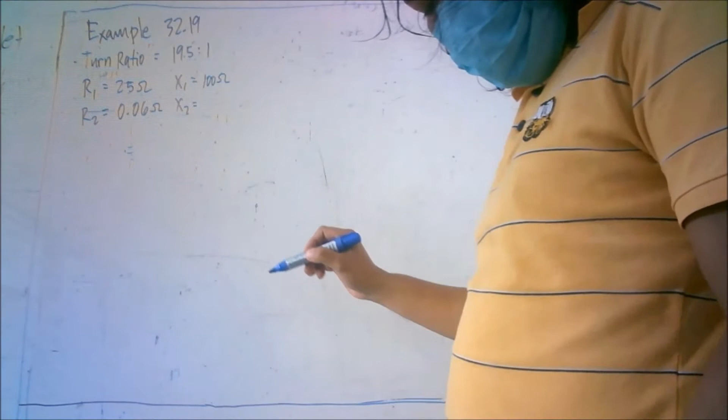Ano pang mga given? No load current ay I0 is 1.25, 30 degrees from flux, leading.

Tapos, secondary delivers at 200 amperes. I2 is equal to 200 amperes. Anong power factor niya? 0.8. And V2 terminal voltage is equal to 500 volts. So yan po yung ating mga given.

Okay. So solving daw po natin, determine by the aid of the vector diagram, the primary applied voltage V1. Ano pa? Primary power factor PF primary. Ano pa? And efficiency. Yan po yung mga kailangan natin alamin.

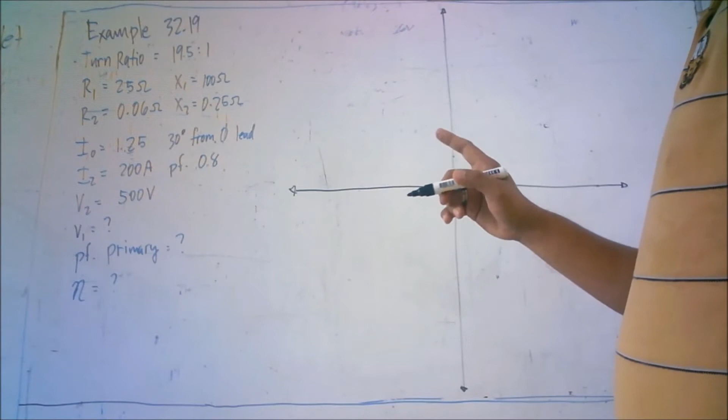Given natin yung I2 saka V2. So, kapag inductive load tayo, so we have V2 here. And I2. So, I2 natin ay 200 amperes. Yung V2 naman natin ay 500 volts.

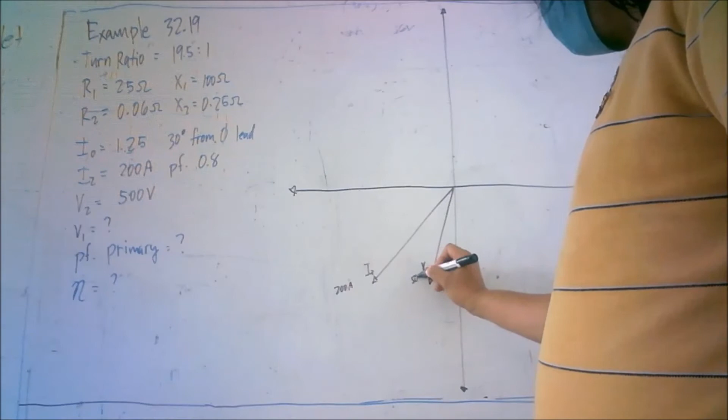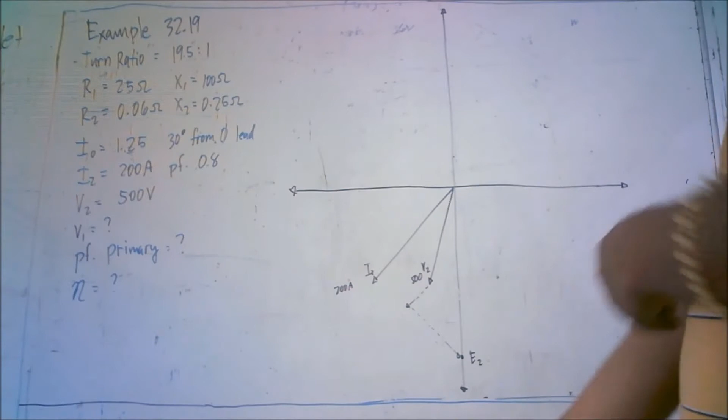So, sa pamamagitan niyan, makukuha na agad natin yung ating E2. So, yan bawa yung E2 natin nandito. Paano natin ma-determine yung E2 natin? By using the formula, E2 is equal to V2 plus I2 Z2.

So, di ba sa ating transformer, halimbawa may tayong transformer dito. Meron tayo ditong E2. Tapos meron tayo ditong V2. So, may current tayo I2. So, makukuha natin yung Z2 by combining our resistor and our inductor. So may voltage drop dito plus yung V sub 2 equal dun sa E sub 2 natin.

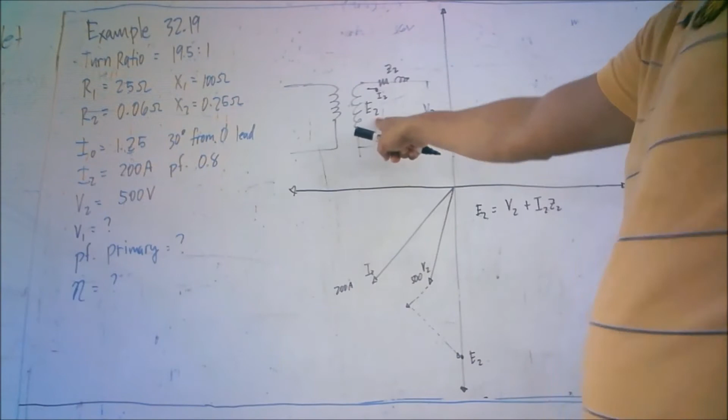Okay? So ilagay na natin yung mga parameters. E sub 2, V sub 2 is 500 volts. So ito po ang ating reference, V sub 2, at angle of 0 degrees. Plus, I sub 2, ano po yung I sub 2 natin? 200 amperes. Ano pong angle niya? So, our power factor here is 0.8.

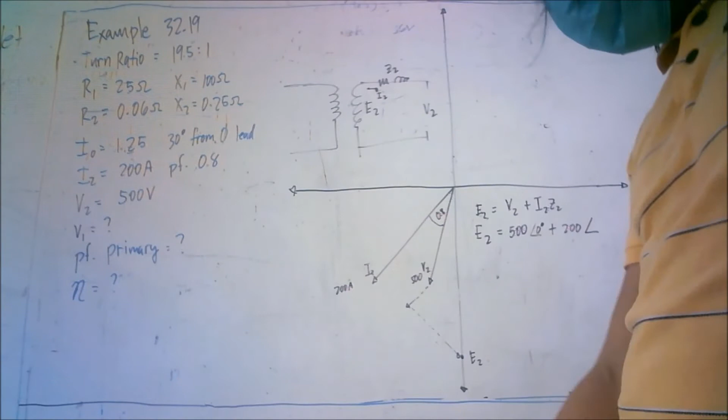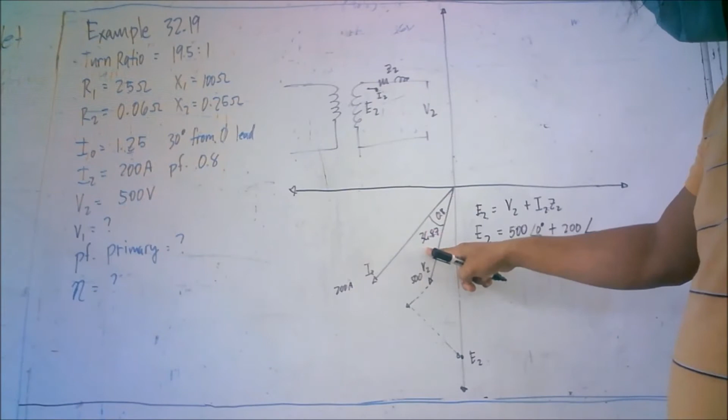So, shift cosine 0.8, 36.87. So, since nahuhuli siya sa V sub 2, so ibig sabihin, yung ating I sub 2 is laging lag V sub 2 by an angle of 36.87. So, negative 36.87.

Times. Ano yung Z sub 2 natin? Ang Z sub 2 po natin ay ito po, I2R2 saka I2X2. So magkakaroon po tayo dito ng I2 Z sub 2. Ano naman yung Z sub 2 natin? So sabi natin yung pinagsama natin ng R2 saka X sub 2.

Ano yung given R2? 0.06 plus j 0.25. Yan. So yan po yung ating E sub 2. So makukuha na po natin yung E sub 2 natin.

Compute natin 500 at an angle of 0 degrees plus 200 at an angle of negative 36.87 times the quantity 0.06 plus j 0.25.

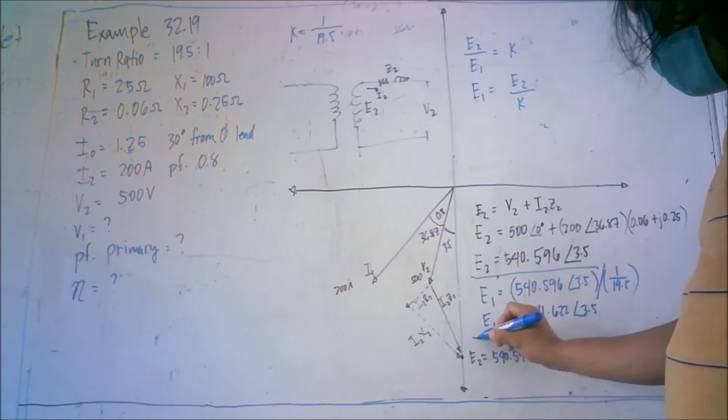Kasi 10,000 to, ito 540. Ang E sub 2 natin ay 540, so times 19.5, E sub 1 natin mahaba pa. Pero yung E sub 1 natin nandito daw sa taas. So kung nasa taas siya, anti-phase, so magiging negative E sub 1 yan. Kung positive ito, sa kabila negative. So negative E sub 1, so times negative 1.

Yan, so yun pa rin, 10,541.622 at an angle of negative 176.52. Ibig sabihin, mula dito sa E sub 2, negative 176 papunta dito. Pero kung gusto niyo dito dumaan, i-minus mo lang ito na 360 minus 176, magiging positive yan. So negative E sub 1 is, ilampas ko na lang dito.

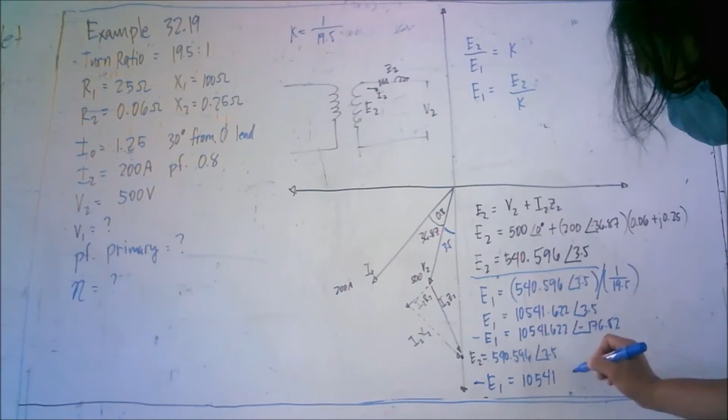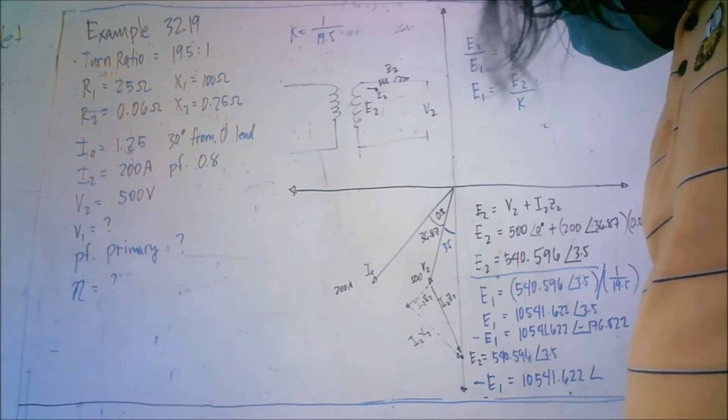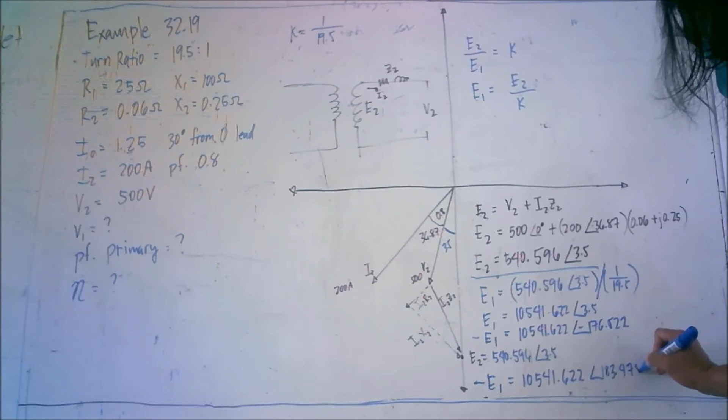10,541.622 at an angle of 176.522 ilalagay natin. 360 minus 176.522 - yan, 183.478. So 183.478, nakalagay dito po yan.

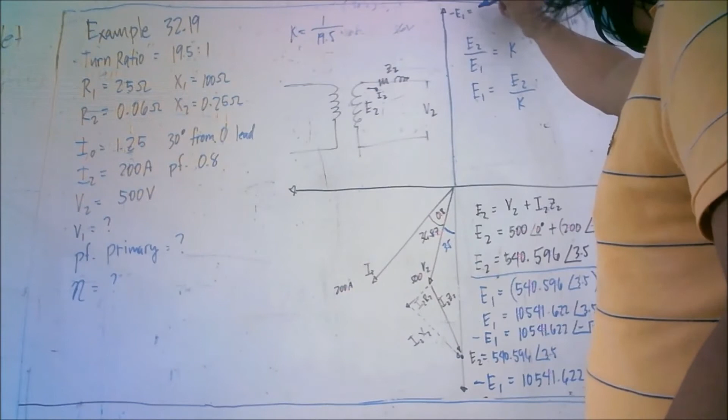So ito po yung ating E sub negative E sub 1, equal to 10,541.622 at an angle of 183.478.

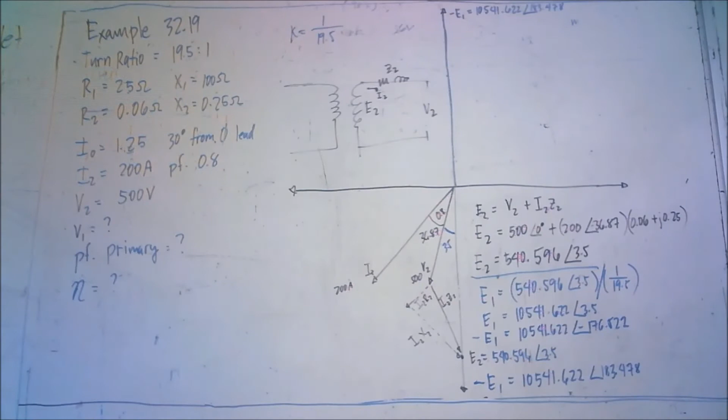Okay, so meron na tayong E sub 1. Pahingin ko na to. Kailangan natin ng pagsosolban. Nakuha na natin si E sub 1. Ang kailangan naman natin makuha ay siyempre si V sub 1.

So ano pa yung V sub 1 pala? Kung halimbawa ito ay V sub 1, ito yung ating E sub 1, tapos tayo dito ay merong Z sub 1, tapos I sub 1. So para makuha natin yung V sub 1 is equal to ilan? Voltage drop ay I1Z1 plus E1 - o yung negative E1 natin kasi negative siya. So negative E1. Yan po yung ating V1.

Kaya lang, wala pa tayong nakukuhang I1. Saan natin kukunin si I1? Ayun, meron tayong given I2. Diba napag-aralan natin, I sub 2 prime over I2 is equal to K. Yan, so I sub 2 prime is equal to K times I sub 2.

So pwede na natin itong pag-multiply. Ang K natin ay 1 over 19.5 times I sub 2 is 200, at an angle of negative 36.87.

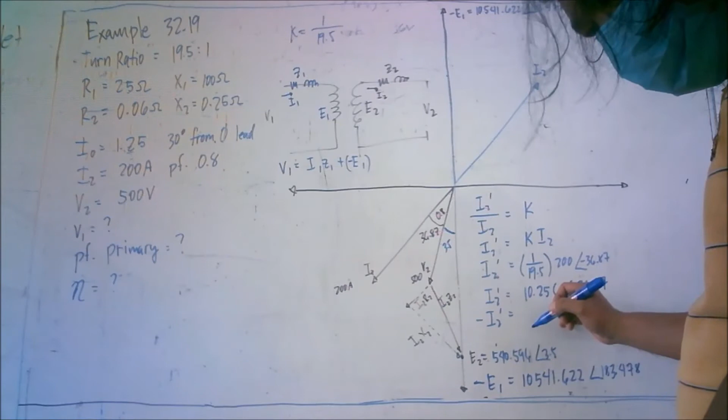Pero sabi natin, yung I sub 2 daw, I sub 2 prime, ay nandito sa kabila. Ibig sabihin, nakuha natin sa I sub 2 prime, so magiging negative. Negative I sub 2 prime is equal to, times negative 1 natin, kasi nasa kabila siya eh. Ano yung magiging sagot natin? 10.256 pa rin at an angle of 143.13. Okay, meron tayong I sub 2 prime.

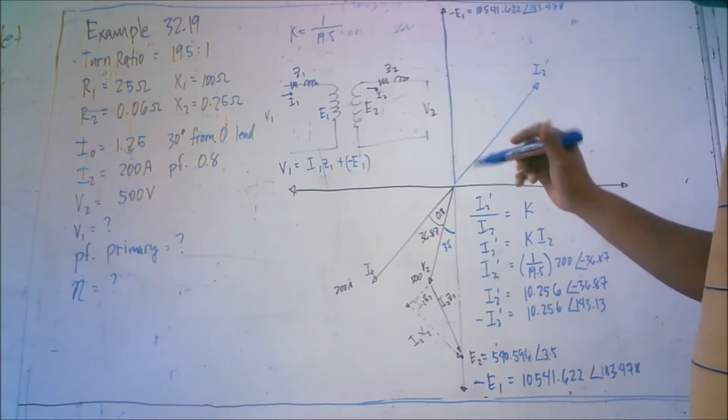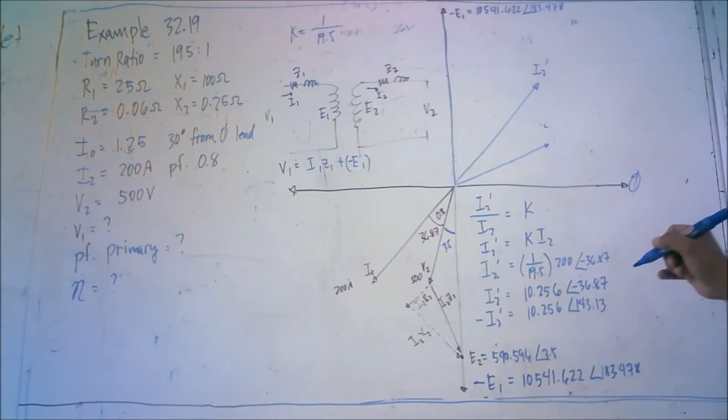So kailangan natin ay I sub 1. I sub 2 prime is just a component of I sub 1. Ano ba yung isang component? I sub O is leading the flux. Ito po yung flux natin, is leading by 30 degrees. So nasa flux tayo, yung ang ginawang reference. Leading by 30 degrees. Okay, so nandito yung I sub O natin.

Yan, ano yung magiging angle ni I sub O? Si I sub O is equal to - ano yung given? 1.25. Ano yung angle? Hindi po 30 degrees kasi reference natin ay V sub 2. 30 plus 90 degrees plus 3.5. So 30 plus 90 is 120 plus 3.5, 123.5 degrees. So meron na tayong I sub O at saka I sub 2 prime.

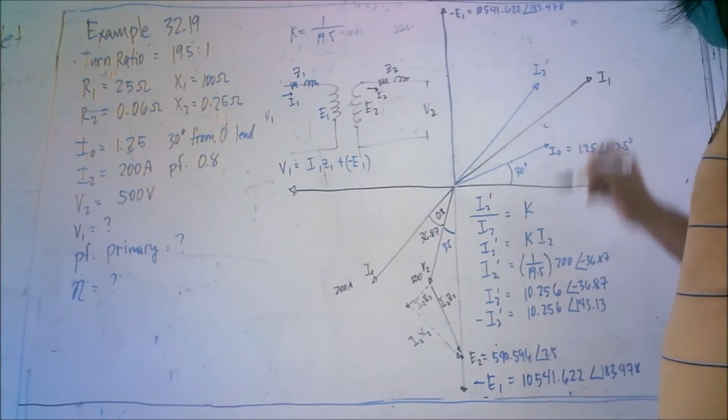So makukuha na natin si I sub 1. Paano natin makukuha sa I sub 1? Simply, pag-add mo lang itong dalawa, pag pinag-add natin yan, makukuha natin si I sub 1. Pahirin muna natin ito. I sub 1 is equal to I sub O plus I sub 2 prime. Ano yung I sub 1 natin? 1.25 at an angle of 123.5 degrees plus I sub 2 prime is 10.256 at an angle of 143.13.

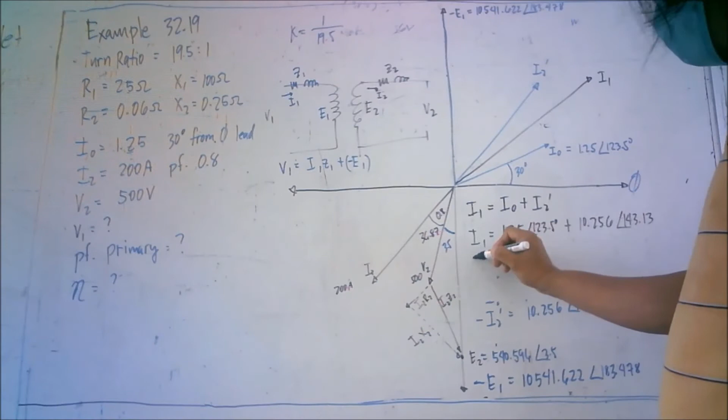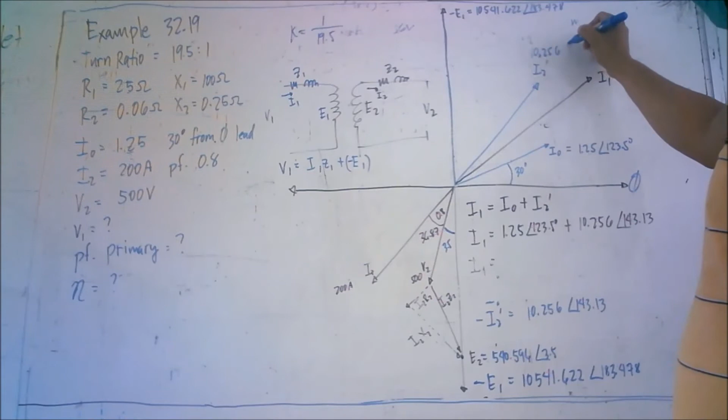So I sub 1 is equal to ilan? Sulat ko muna yung value ni I sub 2 prime dito - 10.256 at an angle of 143.13. So I sub 1 will be equal to, computin natin, 1.25 at an angle of 123.5 plus 10.256 at an angle of 143.13.

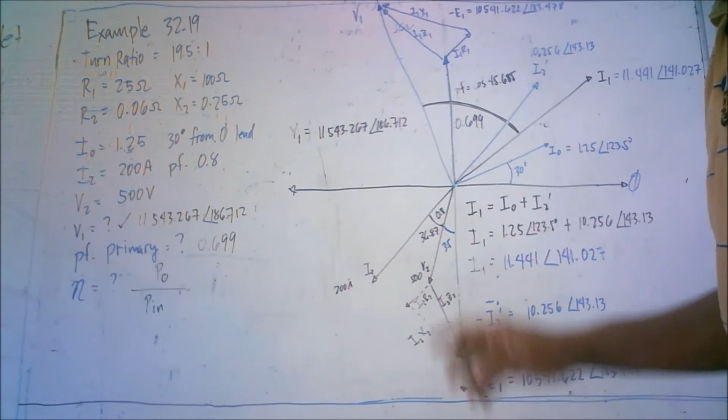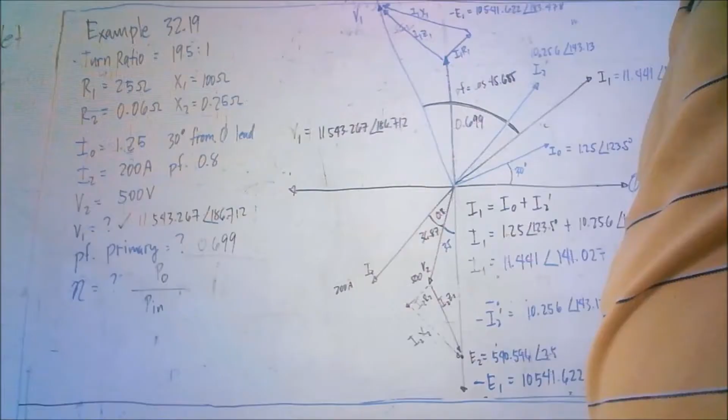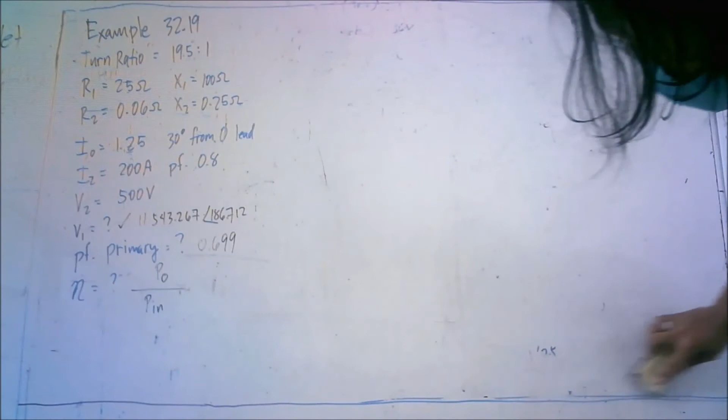So, yun. Pahingin ko na muna to. Since meron naman tayong mga parameters na nakuha, so efficiency na lang ang kailangan natin.

Ano ba yung P output natin? Ang power output natin ay, syempre, doon sa secondary natin. Ano ba yung mga parameters ng secondary natin? Ang secondary po natin ay I2 is 200 amperes.

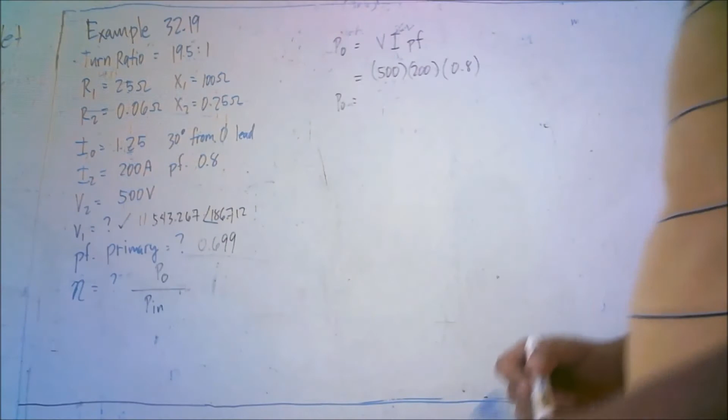is VI pf, voltage times current times power factor. So, voltage is 500 volts times current is 200 amperes times power factor. Anong power factor natin? 0.8. So, power output is equal to ilan? 500 times 200 times 0.8 equals 80,000. Okay, so meron tayong P output.

Ano yung power input? So, power input po natin, i-add po natin yung mga losses. Ano-ano po ba yung losses na kailangan natin makuha? Meron tayong tinatawag na iron loss at saka copper loss.

Saan nga natin nakukuha yung iron loss o yung ating core loss? Kung mapapansin nyo po, meron tayong iron loss component sa ating ISAB po. So, nandito po yun. ISAB po, meron tayong iron loss component, I sub w. So, yun po ang ating kailangan makuha.

Tapos, anong gagawin natin dyan? I-multiply po natin yan kay voltage. So, ano po ba yung voltage ng ating primary? So, yun. 11,543.267. Okay, so ano nga ulit yung ating value ng ISABO? I sub o is equal to 1.25.

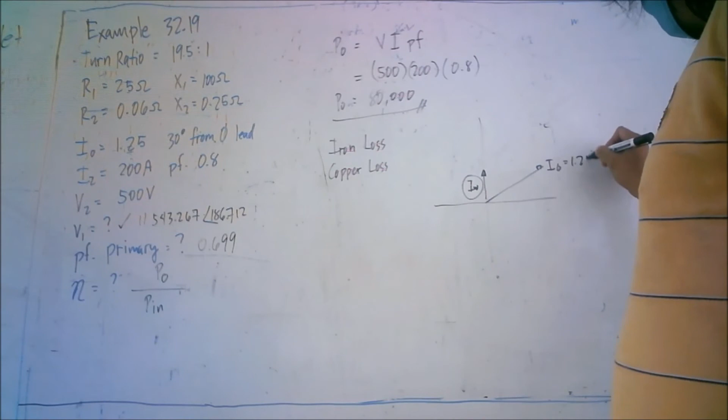1.25. So, this is 30 degrees. So, ito po ang ating hinahanap. This is 60 degrees. So, ISAB working component is equal to ilan? 1.25 cosine, adjacent side, cosine 60 degrees. So, this is equal to ilan? 1.25 cosine 60.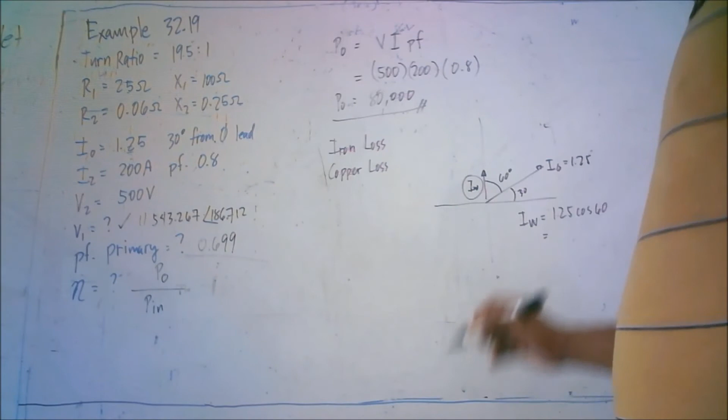0.625. And then V1, ano po yung V1 natin? V1 is equal to 11,543.267. So, ibig sabihin, ang power or iron loss is equal to 11,543.267 times V1 times I sub W. Ano yung I sub W natin?

So, isulat yung formula nito: voltage power ng iron loss is equal to voltage times I sub O cosine theta. Or I sub O cosine theta is I sub W. So 0.625 times 11,000 equals 7,214. So, 7,214.542.

So lagay natin dito, P iron is equal to 7,214.542 watts. So watts yan. So this is also in watts. So meron tayong iron loss.

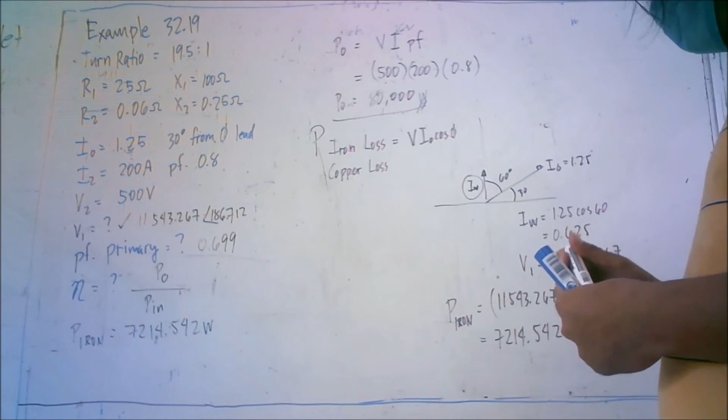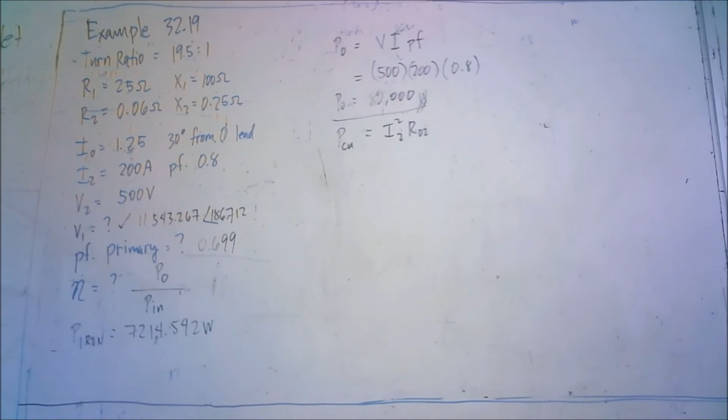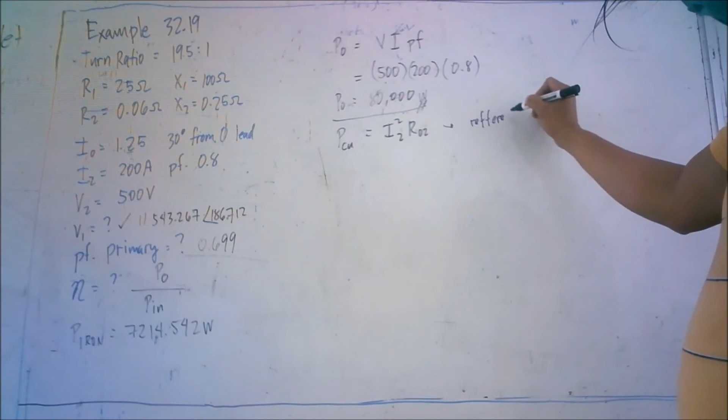So copper loss naman, ang kailangan natin, copper loss. Copper loss. Kung minsan ganito ang kanyang... So power or the copper loss is, may formula tayo na I sub 2 squared R sub O2. Okay? I sub 2 squared R sub O2 squared. This is referred to secondary. Referred to secondary. So, I sub 2 squared, R sub O2.

Ayan. So, may ilalagay natin yung R sub O2. So, paano ba natin kinukuha yung R sub O2? R sub O2 is the resistance referred to secondary. So, R sub O2 is equal to R sub 2 plus R sub 1 prime. So, ibig sabihin, R sub 1 prime, ano yung magiging formula ni R sub 1 prime?

So, R sub 2, given yan, ano yung R sub 2 natin? 0.06 plus. Ano nga ba yung K natin? K is equal to 1 over 19.5. So, di ba, ang R sub 1 natin, R sub 1 prime is equal to R sub 1 times K squared. Yan. R sub 1 prime is equal to R sub 1 times K squared.

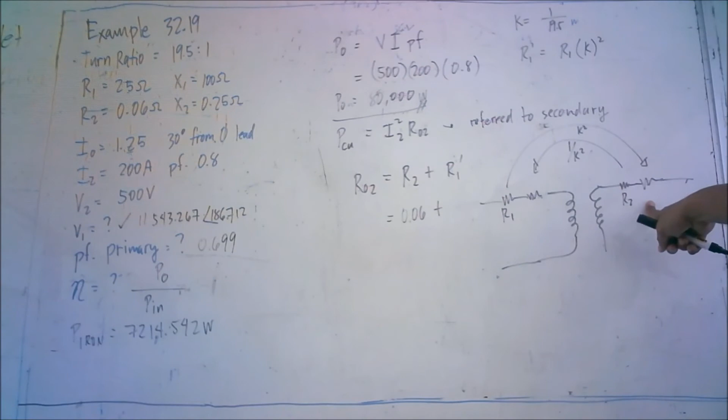So, R sub 1 prime, kasi pagka, sulat ulit natin dito, para maalala natin. Mapaalala ko sa inyo. So, kapag meron tayong resistor, R sub 1, R sub 2. So, kapag pabalik ka, so R sub 2, idadali natin dito, divide natin ng 1 over K squared. Ngayon, kapag R sub 1, dadali mo dito, itatimes mo ng K squared. So, since R sub 1, dadali mo sa secondary, magmumultiply tayo ng K squared. So, ayan. So, maliwanag na yan, ha?

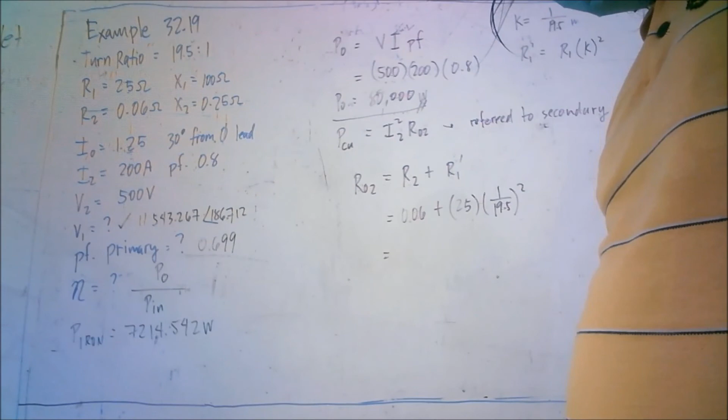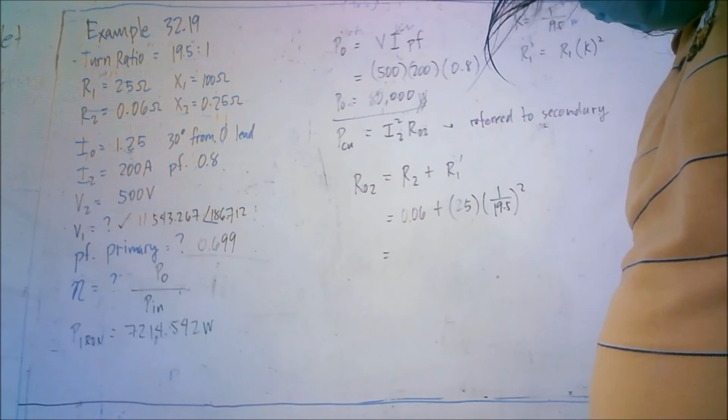So, R sub 2 plus, anong R sub 1 prime natin? R sub 1, anong R sub 1? 25 ohms times the quantity K squared, 1 over 19.5 squared. So, this is equal to plus 25 divided by 19.5 squared. So, 0.1257. So, this is our R sub O2.

Okay, so power ng copper loss natin ay I sub 2. Ano nga yung I sub 2 natin? Na-compute natin is 200 squared, times R sub O2, times 0.1257. Okay. Times. So, correct answer is 5,029.848.

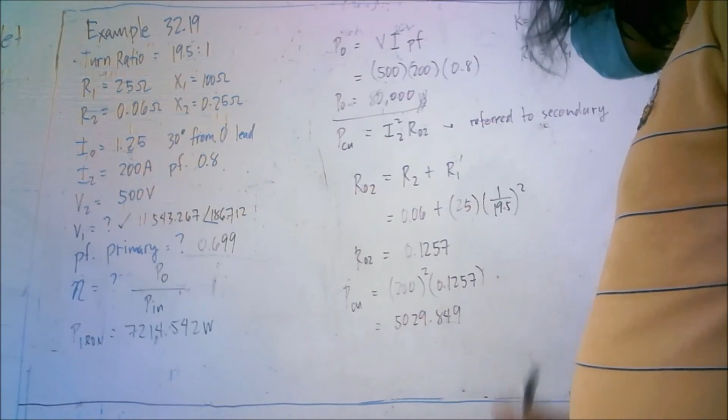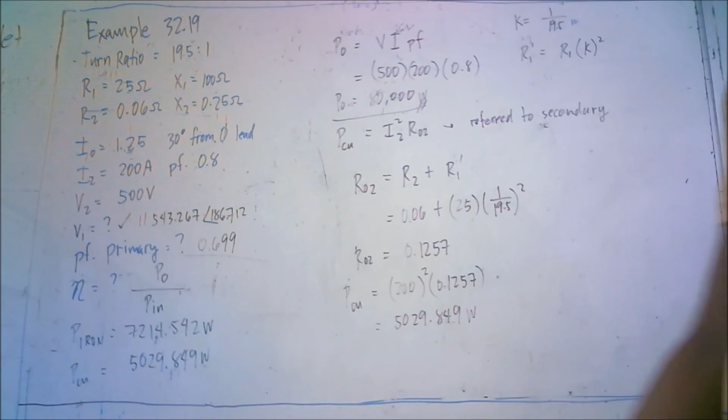848 o 849 na. So, meron na tayong watts. Power ng copper, 5,029.849 watts. Okay. So, meron na tayong copper loss, saka iron loss.

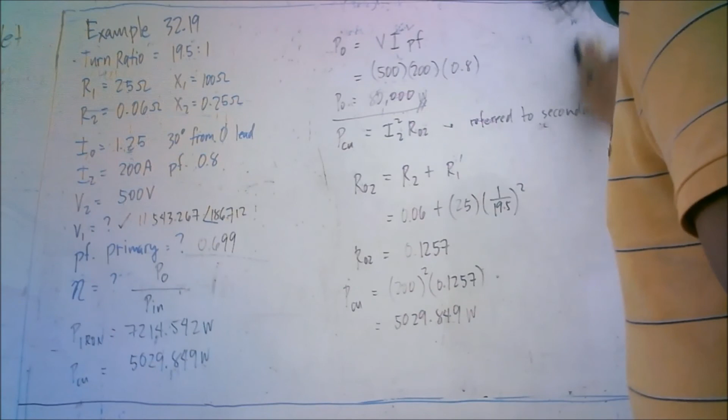So, alamin naman natin yung efficiency. So, tanggalin na natin ito lahat. O, comparison power output. So, power input is equal to power output plus P loss. Ano yung losses natin? Itong dalawa.

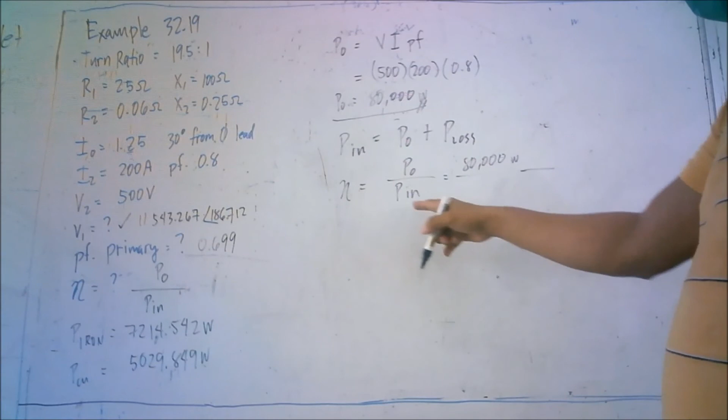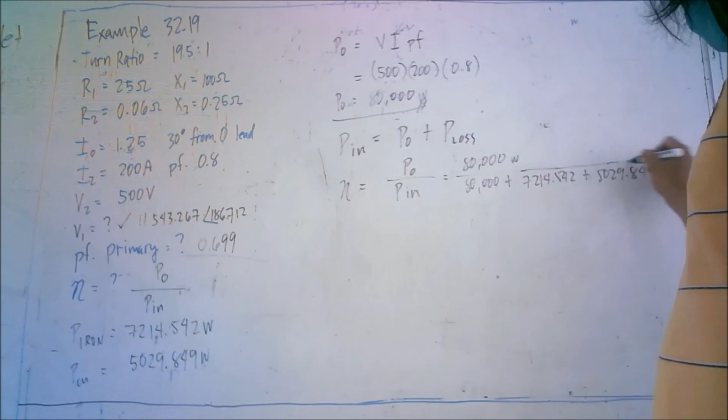So, efficiency is equal to power output over power input. Power output natin ay 80,000 watts, over power input is power output 80,000 plus yung ating losses, itong dalawang ito, yun, power loss: 7,214.542 plus 5,029.849. Yan. So, compute natin.

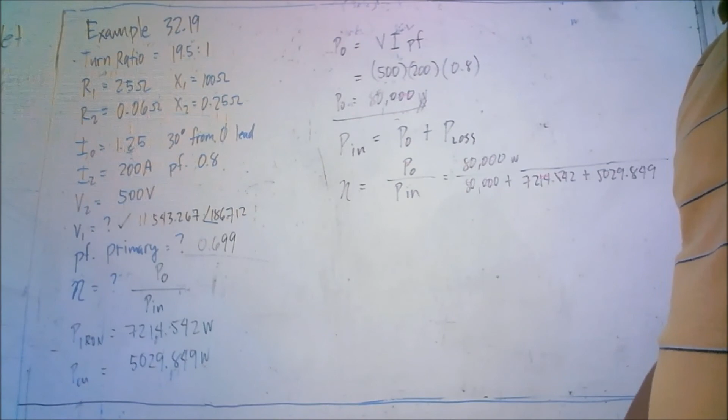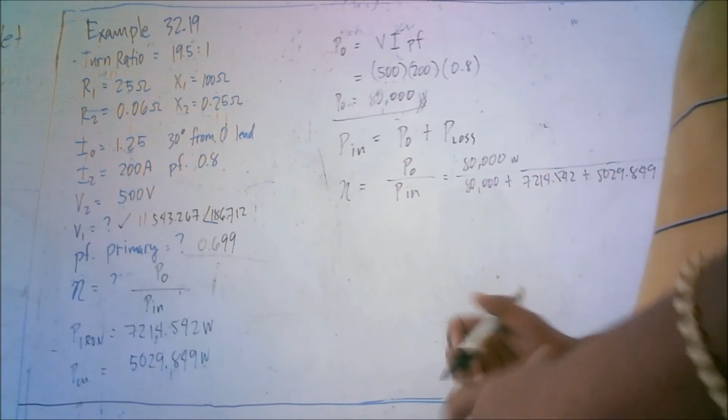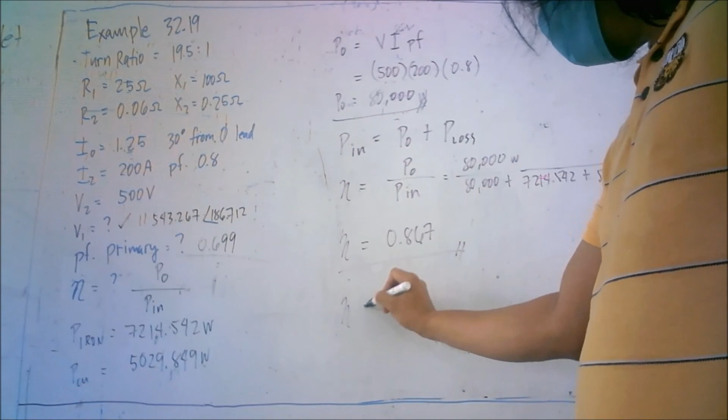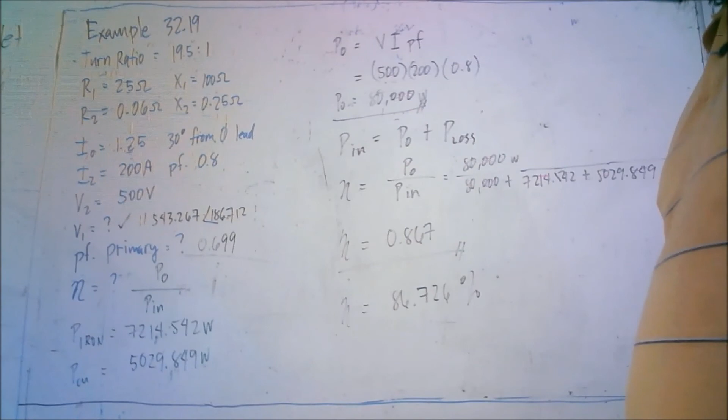0.542. So, correct answer, efficiency is equal to 0.867 yung ating efficiency. Or in percentage, so efficiency is equal to 86.726%. Okay. So, yun po ang nakuha na natin. So, nakuha na natin si primary power factor, efficiency, at saka si V1.